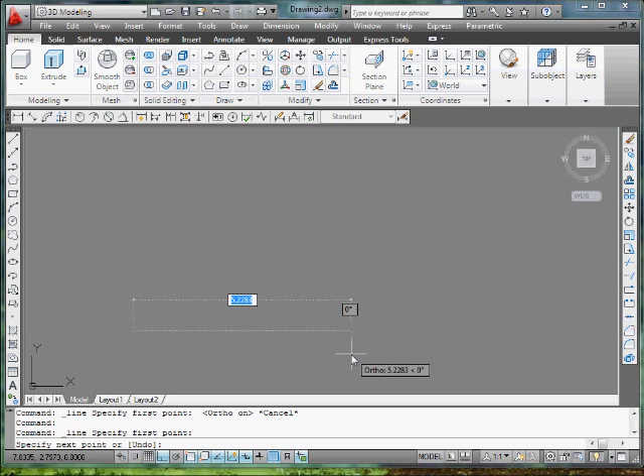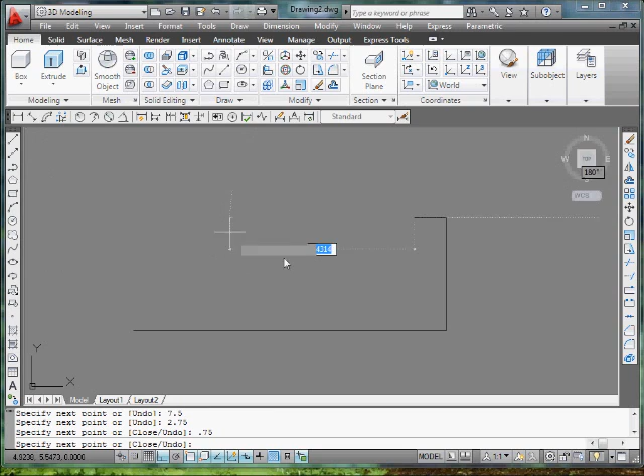7.5, like so. We don't have to exit that command because we're going straight up 2.75, then across 0.75, down 1.75. Across — it's pretty simple, I think you guys can handle this. 1.75, 0.45.

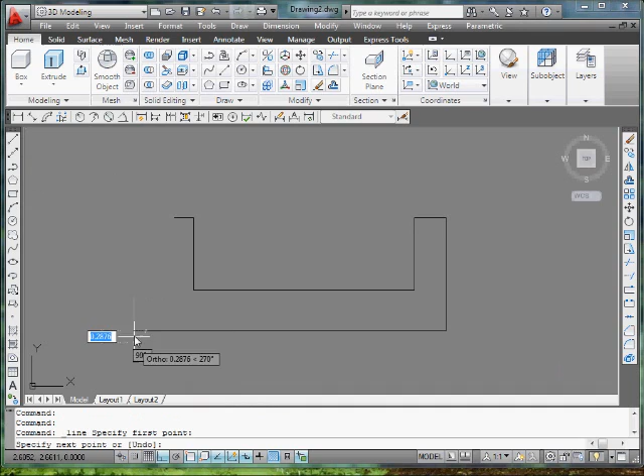Okay, once I get to this point at this corner where it's filleted, I can teach you guys how to use fillet, or I could just draw it out. I'll probably just draw it out because there's no point in using fillet — it'll take you longer. So I'll draw a line from the bottom here, snapping onto it with an endpoint OSNAP command, go up 0.63, and connect it to this right here. Alright, let me go around and make sure everybody's caught up to this.

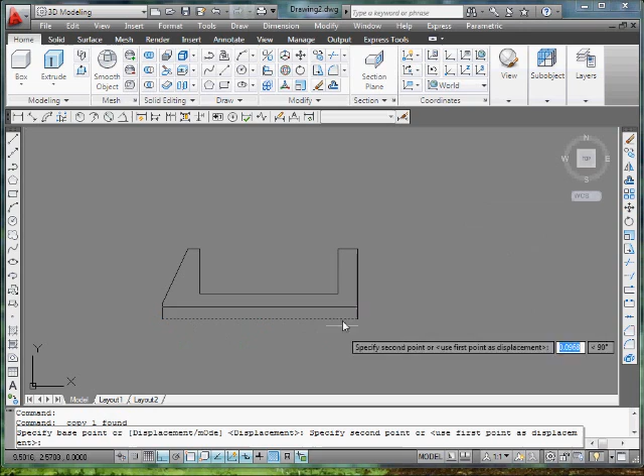So what we want to do is select the bottom base and copy it up 3.75. I did that because the actual piece from here to here is 2.75. If I do 3.75, that gives me a 1-inch gap between the top view and the front view. So 3.75.

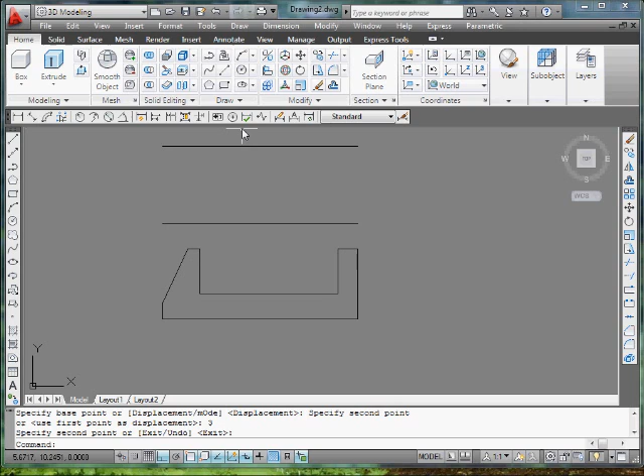I get out of the command, go to copy command again, select this line that I just created, and copy it up 3. I got that 3 because in the side view, if you look at your drawing, it shows 3.

I have that. I'm going to close that box, make it a box — endpoint to endpoint. Make sure you have OSNAP on, and you can see these yellow boxes, which are the endpoints. Or you can specify it on the screen as endpoint. So you select one, select the other, and you're good to go.

Here's the trick for how I'll do the rest of the lines. I'm not going to draw a line from here, even though I could. I'll show you two ways of doing this. One simple way: go to copy, select that line, hit space or enter since that's the one you're selecting, then go from this endpoint to this endpoint. That specifies that exact distance, and you can keep going — except the last one you don't need to do, so you're done. That's the fast and easy way.

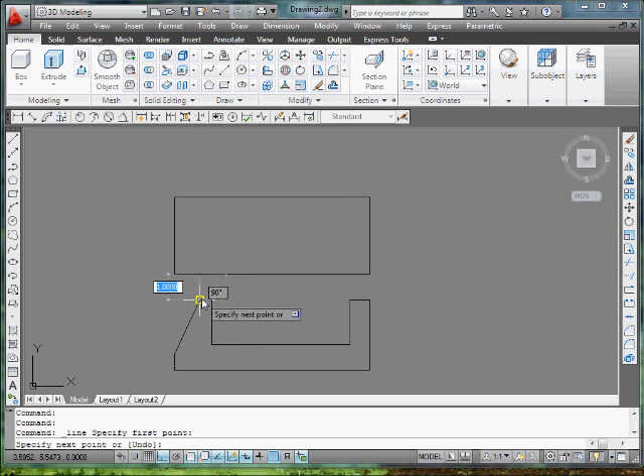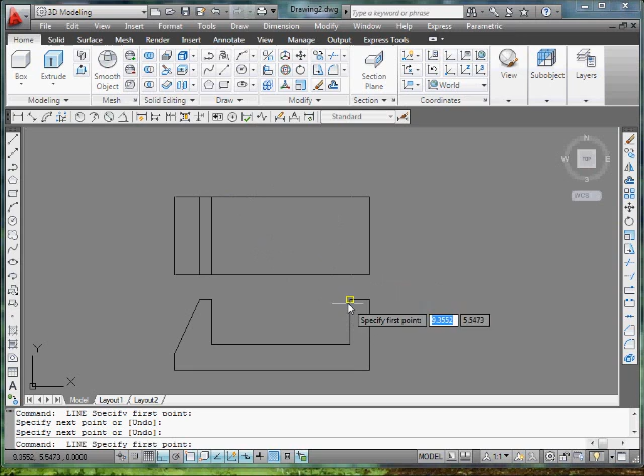The other option is you go to your line command, pick one of the endpoints you know is going to be part of the top view, and drag your mouse straight. That's exactly perpendicular because you get that green dashed line, which helps you see it on the screen. If I move off too much it turns off, so I know I'm not going at a straight angle. So again, snap, snap, and do the third one. Of course, the first way I did it was easier, faster, and more accurate.

So that's the other way of drawing it. Yeah, looks good — that's our top view. Does anybody want me to repeat the first way I did it? I can do it again, I don't mind. Alright, I'll pause this to make sure everybody gets the top view, and then we'll get to the side view.

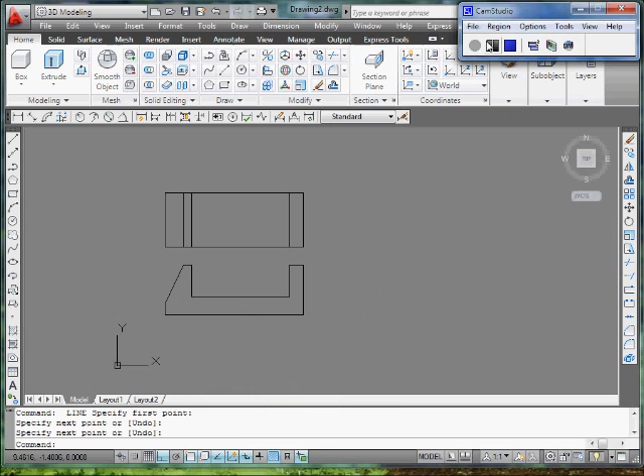So you've got this top and front view. What we're going to do is take this line here, copy it over like so, and make sure my ortho's on. I'm going to copy it 1 inch over, and then from there copy it again, 3 over — that's the actual thickness.

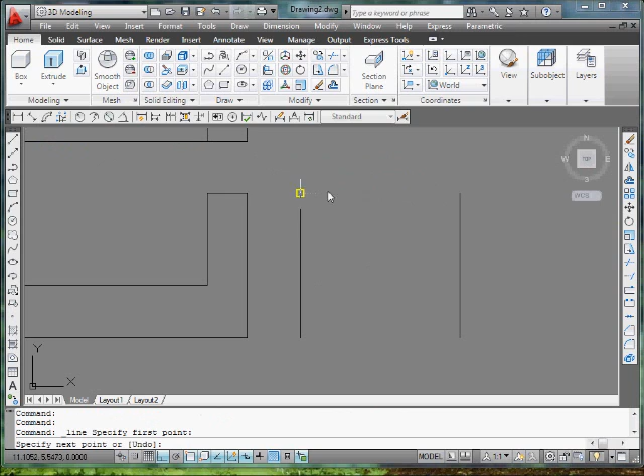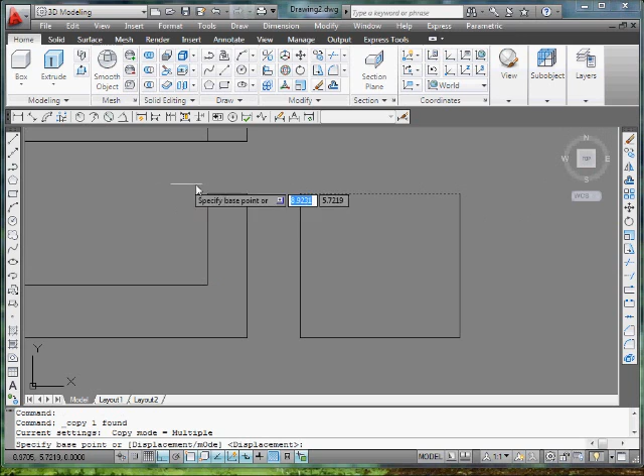So I'm going to close it up and draw another line. I just keep hitting space because it goes back to your previous command, which was my draw command, so it makes it a lot faster. Next step is I need to draw that dashed line here. To do so, I'll select this top line, make a copy, and go from this endpoint to this endpoint, like that — and that's done.

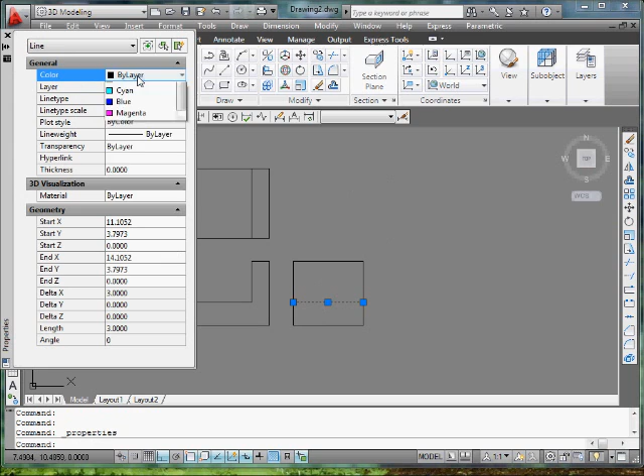Of course, I have to change that layer to make it a dash layer, but I think you guys went over layers already, right? Okay, so I don't have to really explain that. I don't think my layers are set up here, so I'm not going to change it. Let's see — no, I'll just change the color so you guys know what I'm talking about.

I don't have my layers set up, so hopefully you guys are using your title block to draw this. If not, I'll show you guys how to move it from your regular drawing to your title block drawing.

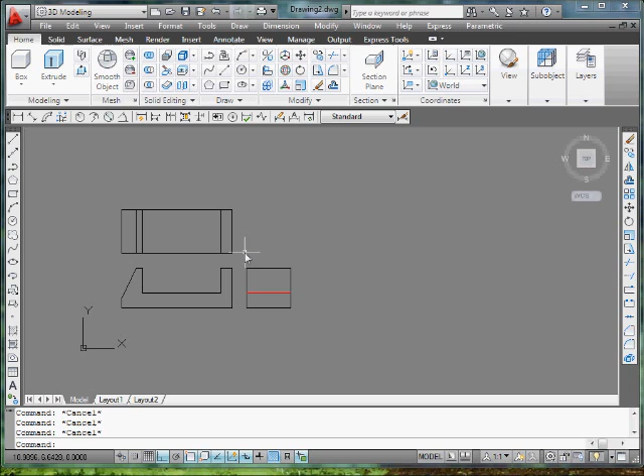Alright, we have this. Our next step we can do a few different ways, but what I recommend doing is selecting your front view and copying it over. We're going to use this to make our 3D object. You copy it over — what we want to do next is go to an isometric view.

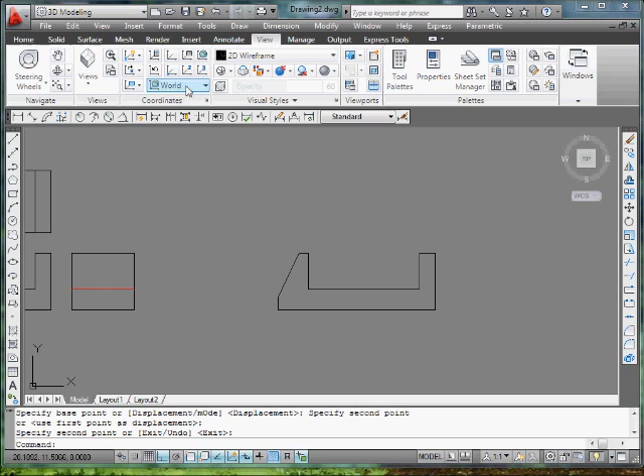To do that, you go to your View tab here, then go to Views. And I usually prefer Southeast isometric. You can use different ones if you want — it's up to you, but that's my preference.

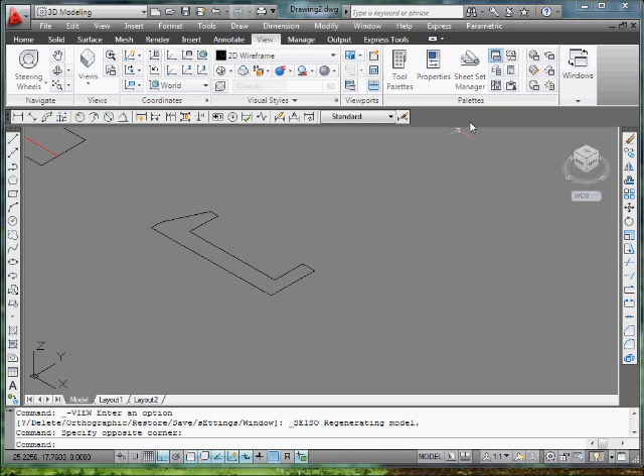So I have something like this, viewing it from the side. Now we're going to use the press pull command. There's actually no toolbar for it anymore, they discontinued it, I'm not sure why, but it still works. If you're in 3D modeling, go to your solids, it's right there, press pull. Otherwise you have to type it in. So if you don't have the 3D modeling set up, don't worry, just type in press pull and it'll work the same way.

I'm going to type it in, press pull. What it wants you to do is click inside the bounded area to press or pull, meaning you have to click inside the object. I haven't clicked yet, but you can see it's being highlighted, and that's what I want to click, so I click there.

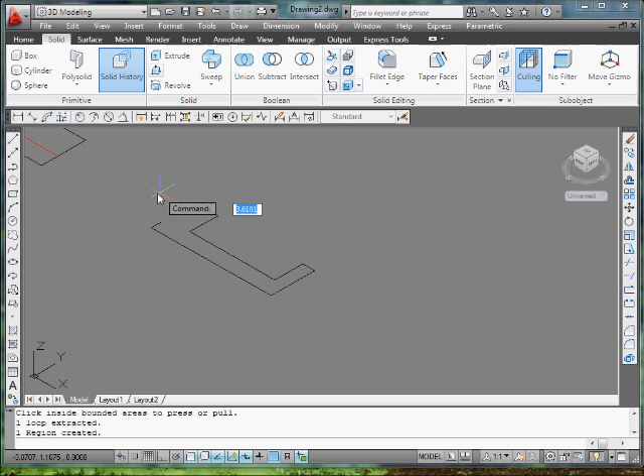I move my mouse up and you can see it's getting an actual thickness to it. Move it up or down. I'm going to go up and type in 3, because that is our thickness of our object. So 3 - end view was 3, that was 3.

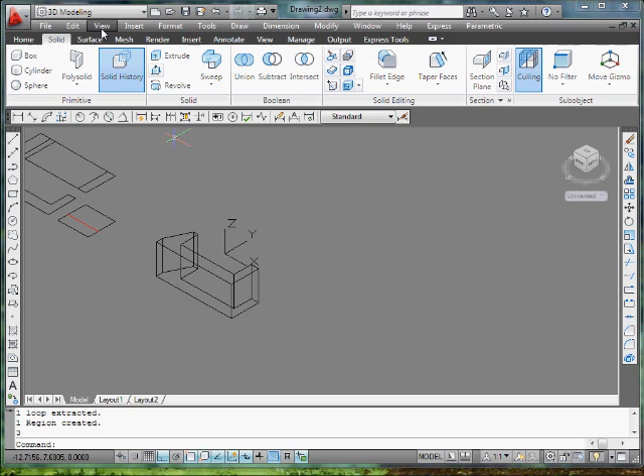So we have that. If you want, you can go to View, Visual Style, Conceptual. You click on that and it gives you a better view of your object. It won't be a wireframe, it will be actual filled-in color, so it looks kind of nicer, easier on the eyes I think.

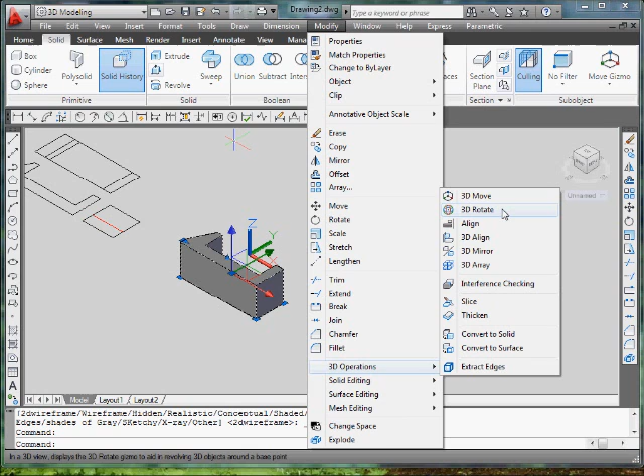I'll also show you how to rotate in 3D, because we want to make this like our drawings. What you want to do is select your object, go to Modify, Solid, 3D Operations, and it's called 3D Rotate. I'll leave it up there for a couple seconds so you can get it in hand. Again, Modify, 3D Operations, 3D Rotate. That's actually a new tool after 2006, I believe, that was created. You select that and it gives you this.

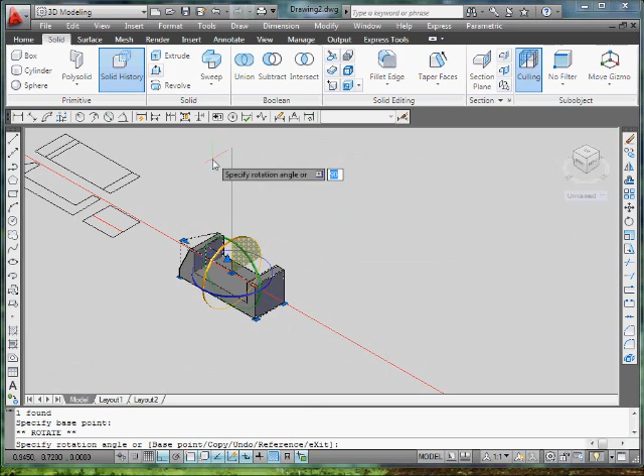It's called a gizmo, I guess, don't ask me why they came up with a name like that. What you want to do is select the red circle - if you move your mouse over it'll highlight so you know you're selecting the correct one. You select that, and moving your mouse at different angles, you'll see how it's being rotated. We want to rotate it this way so the base is on the front, like shown. You rotate, and you click Escape. So I just rotate my item, and I think I should leave it like that.

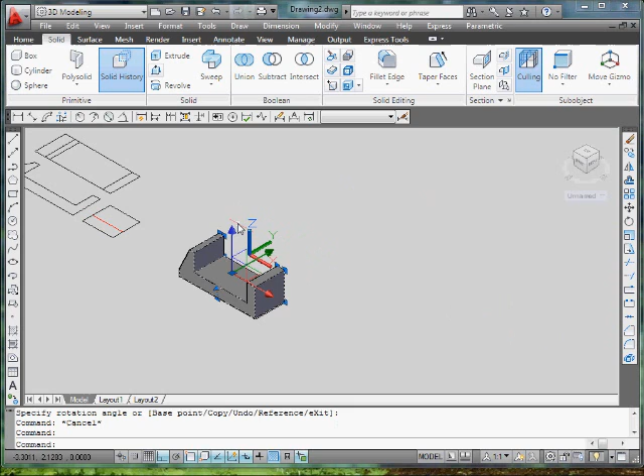That's what we want, but I'll show you another way of doing it too. So we did press pull, that's one way of giving it a solid form. Another option is, if you can't do press pull, you can do extrude, but the object has to be a polyline - meaning it is one single line and not segmented into pieces like shown.

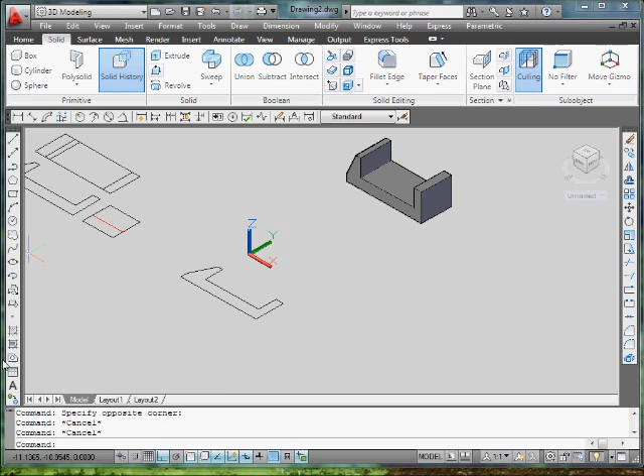So to get it to be one piece without an issue, just go to your region command, which is on the left side down here. It's called region, you can also type it in. You can also go to Home, and it should be right there, region, or go over here and region. So you have 4 different ways of getting to it.

You use the region command, select your entire object - it has to be an enclosed object, otherwise it won't work. You select it and click enter because it's asking if you want to select any more. You're done, so click enter or space. It gives it a shade. If you're in conceptual view, you'll actually see the shade; if you're in wireframe, you won't see anything.

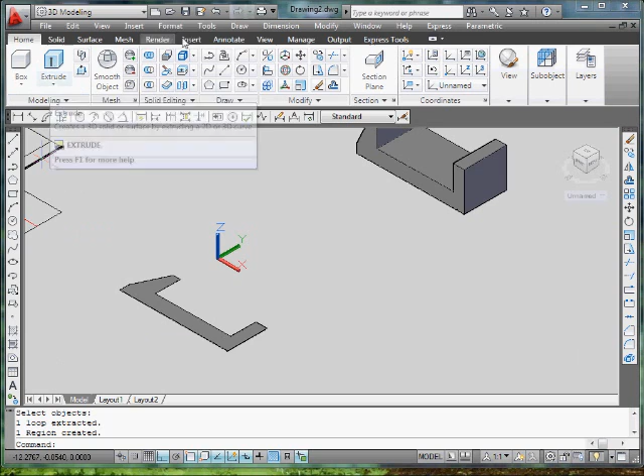So we have that. The next step is using our regular extrude. You can type EXT as a shortcut, or click over here for extrude, or go to Draw, Modeling, Extrude - 3 or 4 different ways of doing it. You select extrude, select your object. It's asking if you want to select any more objects - no, you're done, so click space or enter. Then move your mouse up and type in your distance, which is 3.

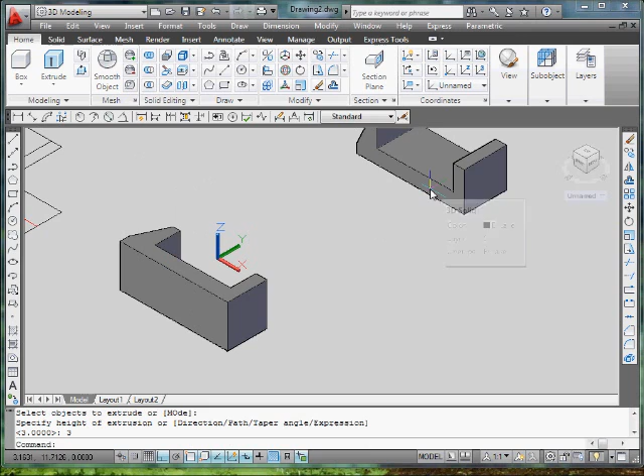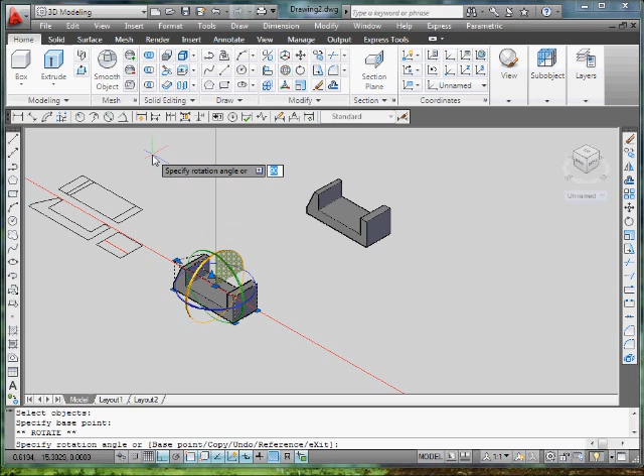Let's go over that rotate thing again, just in case you missed it. So I have this object, I can go to Modify, 3D Operations, 3D Rotate, then select the object, click enter or space. Again I'm using my red circle which is the x-axis, green is y-axis, and blue is z-axis. Red, rotate it, move my mouse up, making sure my ortho is on, otherwise it'll be a crooked rotate. Then I'm going to rotate it again with the blue, over to view it this way. Click escape to get out, and I have both of them.

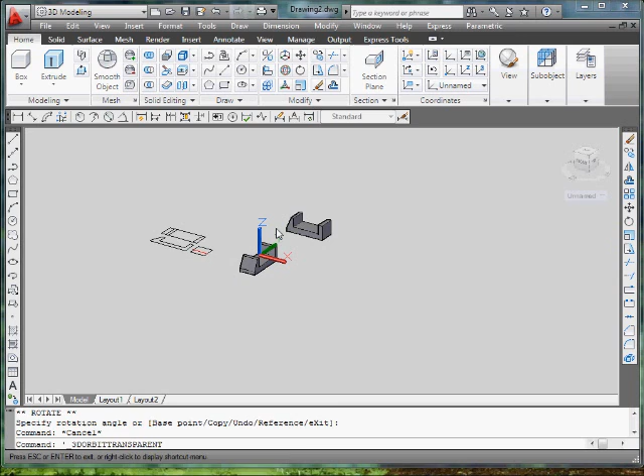Now if you feel like rotating around like this, freeform rotate, what you have to do is hold your scroll button, which is usually pan, and then hold shift. That allows you to rotate around freely. So that's a great tool to know.